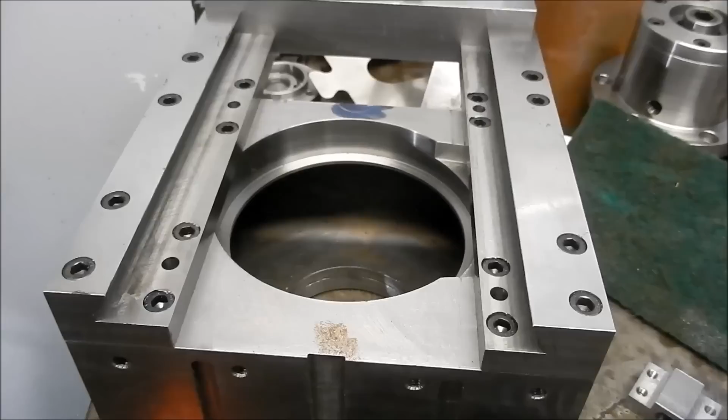Just before we go and have a look at that slide plate, let's refresh our memories on that little slip up we made, on this slide face here, where when we're running it through, the tool dropped out and cut down another 0.5 millimetre deeper than what I had on spec. Because everything's very tight in here, particularly with the crank pin...

I've thickened the plate up by another 0.5 millimetre to accommodate for this. That plate is going to be sitting down 0.5 millimetre closer to that crank pin, so that'll give us a little bit more meat that we can machine out the back of that slide plate, just to give us the clearance that we need.

So bearing in mind the fact that we've dropped 0.5 millimetre on these slides, we're 0.5 millimetre closer to this face than what we should be. So we'll go and have a look at the drawing and go through what we're going to be doing.

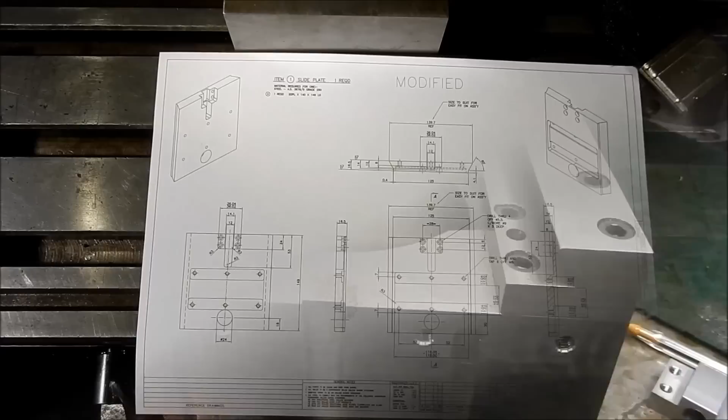Alright guys, hope you can see this alright. This is the slot that we're going to be cutting into the back end, or back face, of our slide plate. As I said, I've made this a modified drawing because we've thickened this up to 16.5, hence all of the dimensions have moved 0.5mm inboard.

I've kept these the same, which means it's not going to affect us any. It's just how we make up the shear pin — we just have to make the shear pin 0.5mm longer, which isn't going to affect us in any way.

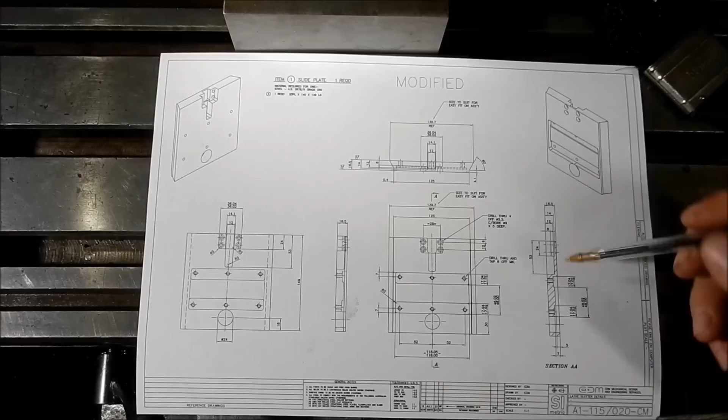So on the back end there, we've got the register that we need to cut for the nut. We've got a little bit of relief that we also need to cut in there for the back of the nut — you can sort of see that up in that ISO view. And then we've got a run out that we need to machine in for the screw, so that it doesn't bottom out.

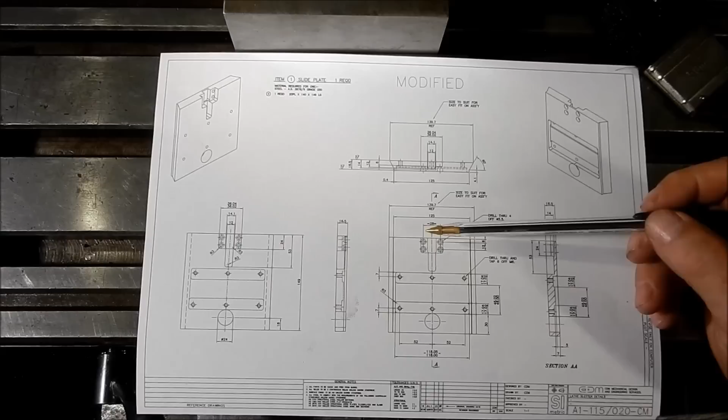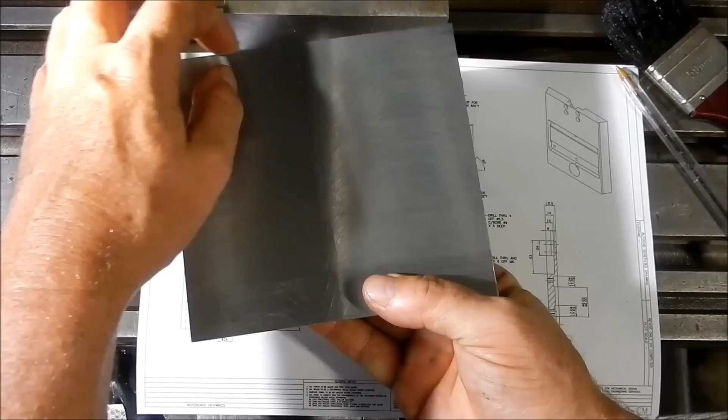So fairly straightforward, but a little bit of setting up to do initially, because this is going to be sitting on the underside in this orientation. These edges, I don't really want to use those as datum edges to work on.

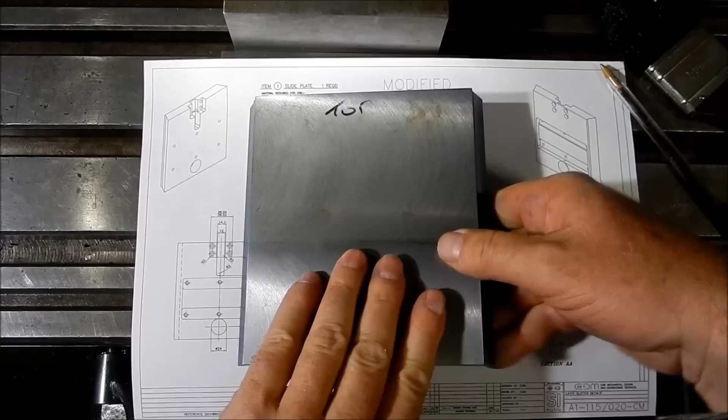I want to use these machined edges here. So the drawing states 125, but I've actually just checked it out with my micrometer. A bit closer, let's see. And that's measuring up dead parallel.

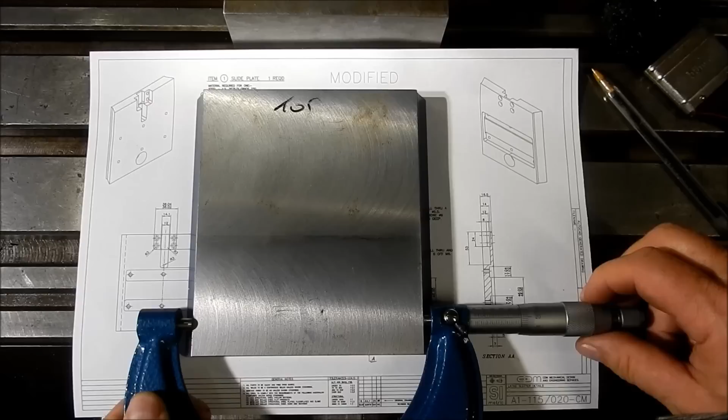You can get it — there we go there. That's 125.1. It's the same up that end there as well.

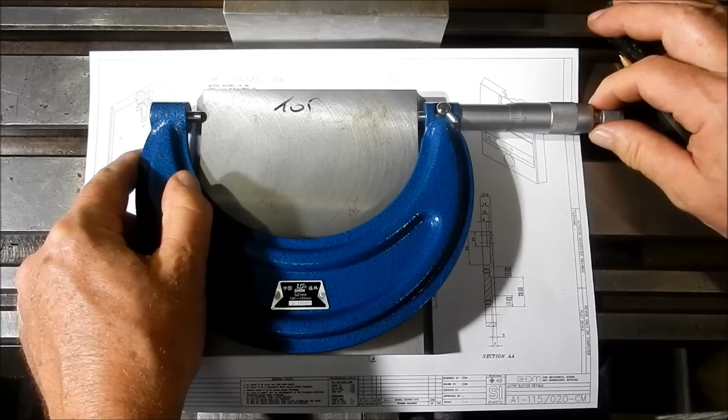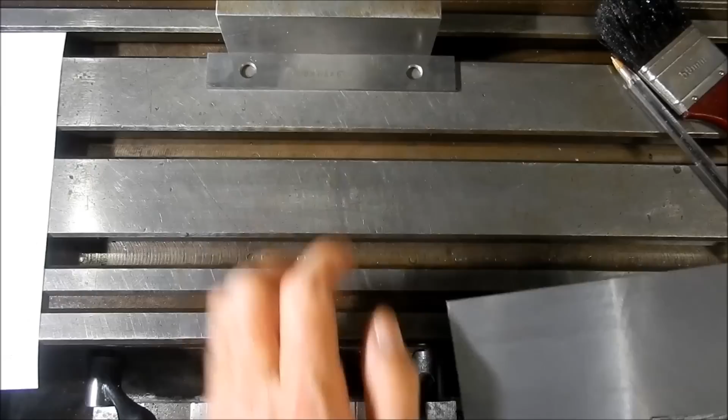Yeah, so that's dead parallel. I want to use that edge there because it's actually sitting underneath the taper. I'm going to set it up like this. I've just got one of my 1/8 parallels that we're going to use to butt that up against to give us a datum point, and then we can work from there to get the center.

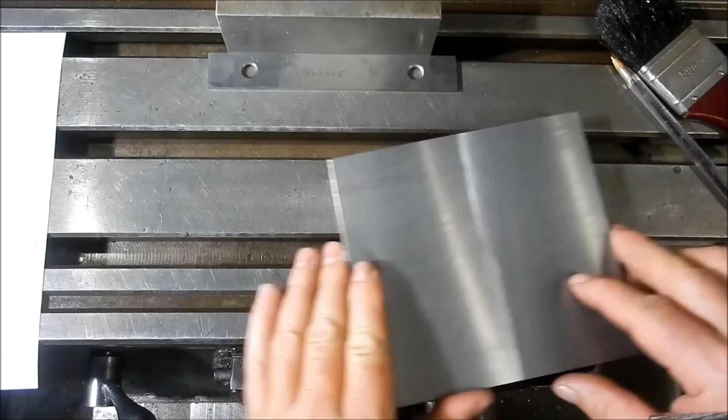What I'll do is set my edge finder down, pick up the edge of that, and come across 105.1 divided by 2 to give us our center, and that'll give us our starting point. Then we'll reference off the edge to go for the depths. So we'll set up to get that organised, get that clocked up, and get us a point to start with, and we'll start doing the machining for this cavity to fit the nut.

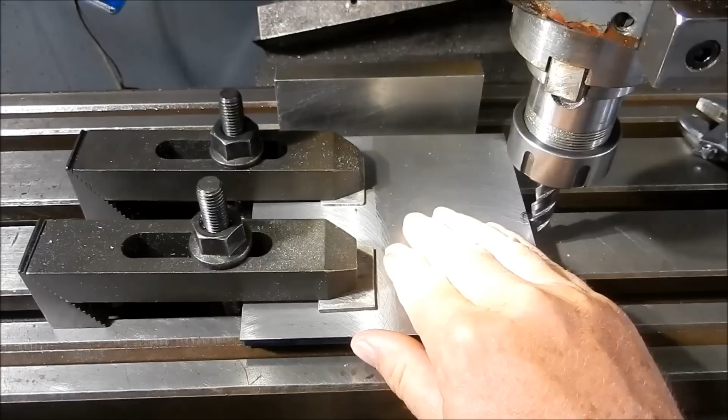Alright guys, back soon. Righto, so we've used the edge finder, we've picked up the edge of that parallel as we talked about, we've pushed the plate hard up against the side of that parallel, and we've come across to our center point. I've touched off, got a depth, and now we're going to start roughing out the slot. We use the 12mm cutter to rough out most of the slot work in this. So we'll make a start.

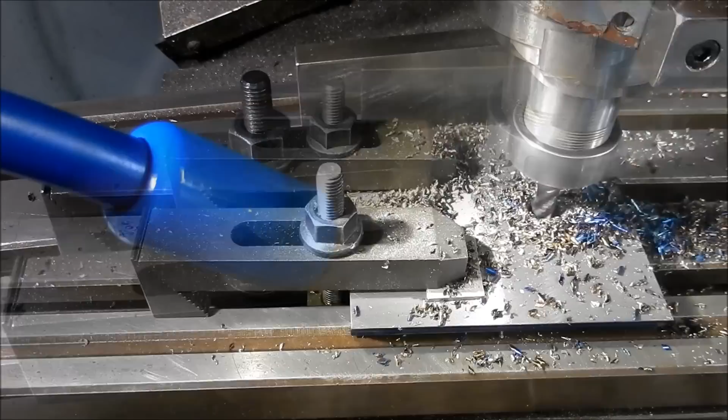Right, just before I back it out of here, you can see that step. I've taken roughly two 5mm steps down, but you can see how it cuts a step in there. That's why I don't like to use these as they are for cutting a keyway. I like to be able to put a smaller cutter in and then slightly side cut to get them exactly right and just set them up with gauge blocks. But yeah, it always tends to pull one way. It'll probably take it out as I come back, but it will be oversized. So I'll just whip this out.

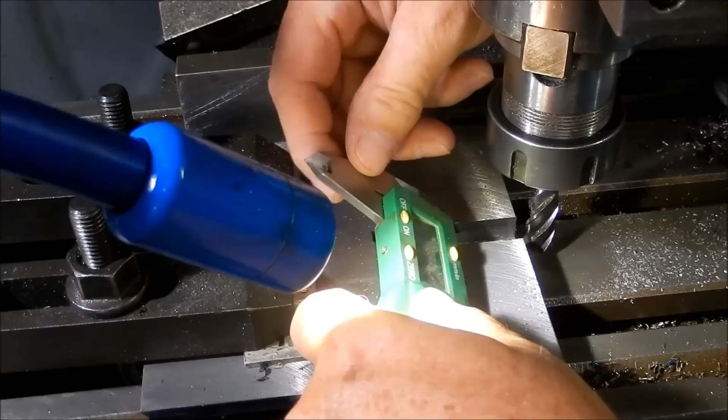I'll try and get in and measure that. We'll measure it this way, just out of curiosity. Yeah, so that has cut oversized to about 12.2.

So as I said, I like to, if I'm doing keyways, run the cutter down because it will always tend to pull out to one side. It's always good to be able to have a smaller cutter that you can actually then side cut down the guts and then just take out each bit, climb milling as you go.

Right, so that's the slot roughed out. I will take a little skim down the outside. This isn't a critical width on this. I'm going to use a 6mm cutter to come down and soften that radius out a little bit as well. Alright, we'll set up for the next step, which is a 14mm slot.

And the next slot is just to house that little extension on that block. So not critical, as I said. The critical dimension is on the outside there, which is going to locate.

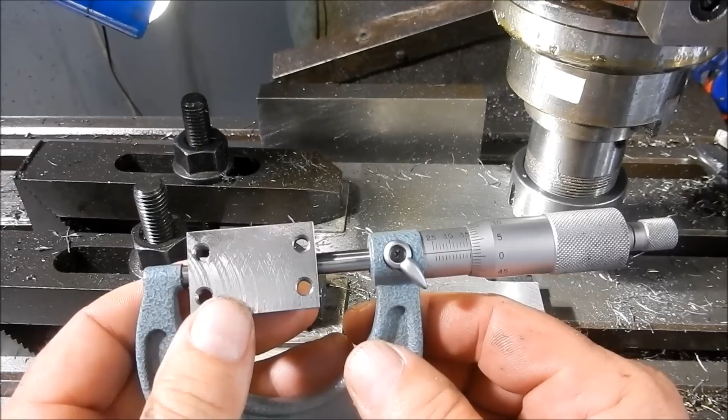Now just looking at the depth or the width we need to make this, so this is 0.025 oversized, so that'll be my fitment. So we've got about 1 mil left to go on that. What I'll do is quickly measure that and see where we're actually at.

Alright, so it's 35.02, so it's cutting pretty well to size. Alright, let's carry on.

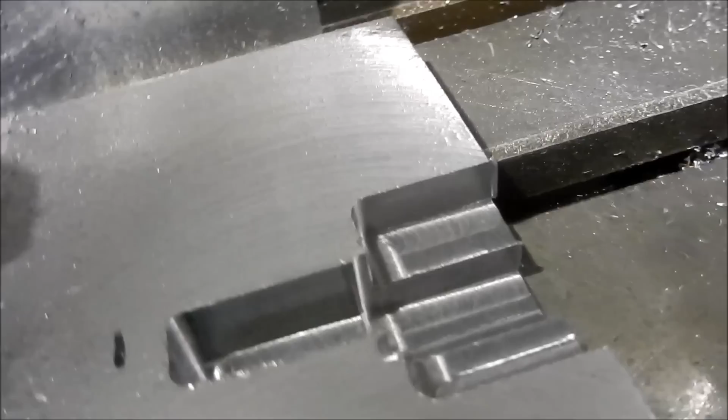Oh, that's how it's come up - it's come up really nice. So I'm just going to do a little bit of hand fitting to get that nut in, and then we'll take the plate out. Flip it over and we can do the drilling and tapping using our datums to pick up a centre line on an edge, and then we'll drill through and counterbore for the cap screws to hold that nut in place.

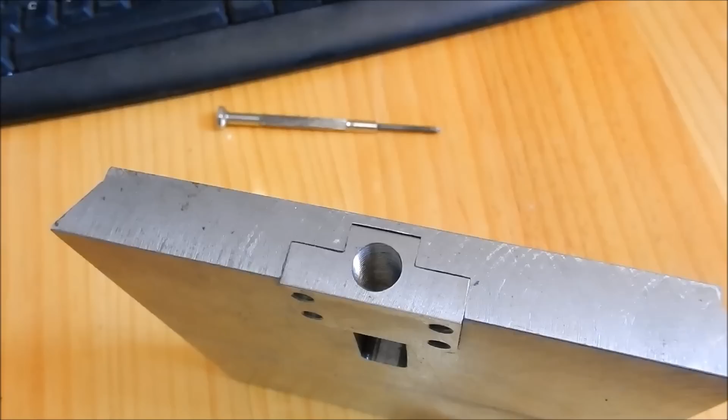Right, let's go handheld for a minute. So that nut's now fitting in place. That was literally just a couple of strokes with a file to get that final fitment.

It's come up really well.

So I'll just put the little 45s on there. Look, you could have put toolmaker's corners in there and just run those cutters down a little bit further. That way I wouldn't have had to worry about putting the 45s on, but it's six of one, half a dozen the other, what you do.

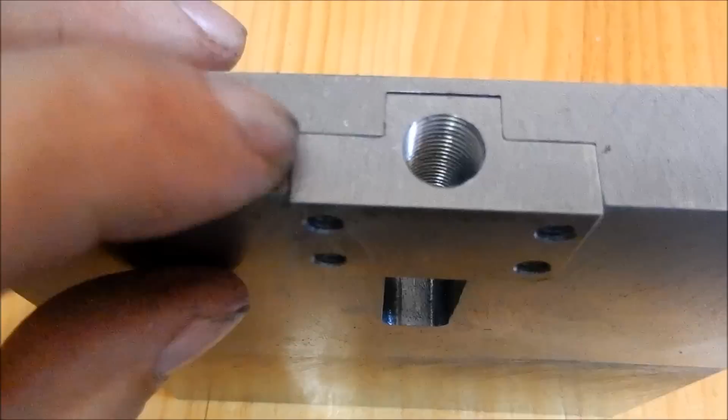So that's it in place. Very happy with that. You can't even feel that transition - it's really very nicely treated.

Alright, so we'll flip this over now. We've got to drill and counterbore for the screws to hold that nut into place.

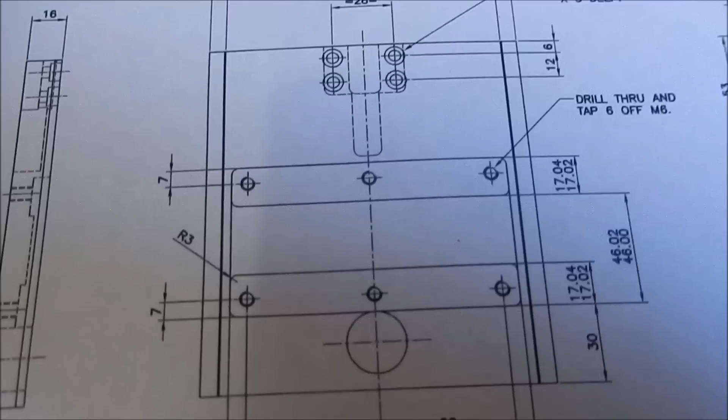And then we've got a fair bit of work to do here with these slots. This is for the housing for the ram, this is going to locate all that, so a bit of machining in that. We'll get set up for that next and get that on the go, and we'll keep moving on.

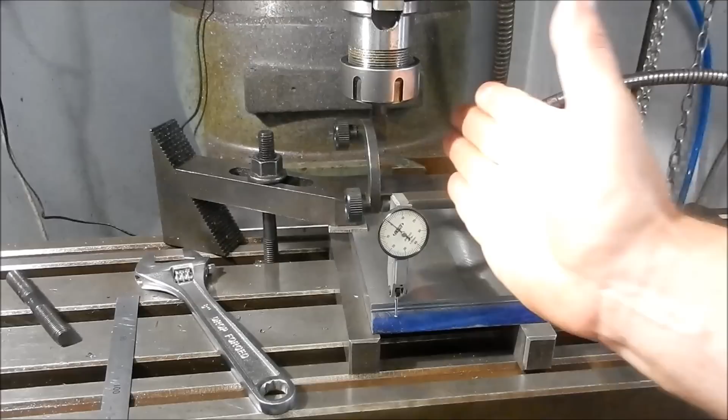Righto guys, we've flipped the plate over. This is our top face here. I'm just clocking up in the dovetails. I need to make sure that's dead parallel, so that when we cut in for this guide box for the ram that's going to sit in here, these need to be exactly at 90 degrees to that slide.

So when we do the drilling and tapping for the counterbores, we're going to register using the edge finder up against that edge, which was the same edge we had upside down on the other side, and the top face. Then we can drill through, counterbore, and get those holes located properly. Then we'll come down and start cutting those slots out. But we've got that zeroed up.

Just hit the clamp, but that's 0, 0 all the way across there now. It was within about 0.02 of the back here, so just coming up against that knife edge. I just had to tap it away a little bit off the tenon at the back.

So all right, we'll use the edge finder. We'll set up, get our center distances and our edge references. For the drilling and counterboring, I'll be coming off the top edge up here, and then for the slides we'll come off the bottom edge here. Not critical in this Y direction, but relative to each other, we want to get them as accurate as we can - we've got fairly tight tolerances I've put on that. All right, so we'll get set up, get centered up, and we'll get started.

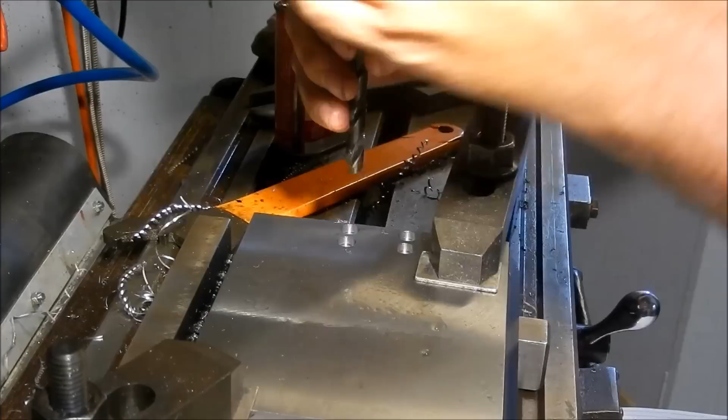Right, we'll get it set up now to do the milling of the slots for the keeper plates for this guide box for the ram.